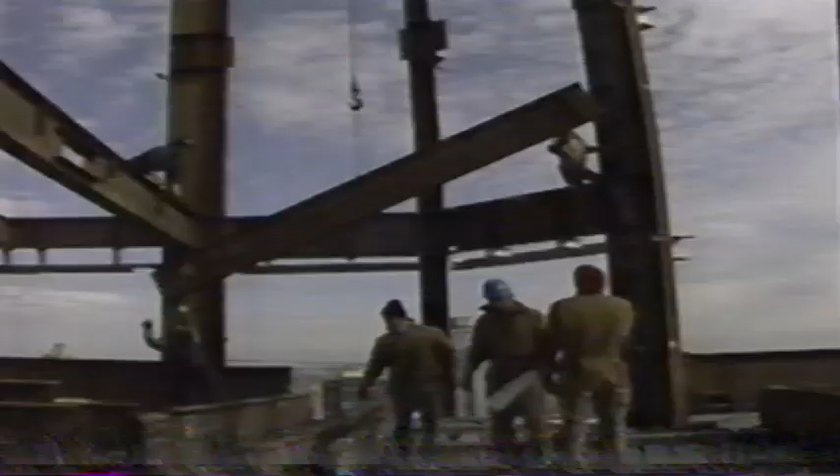Of course, with so many partners, there are bound to be fights. I want a letter to SOM saying, you owe us 5 weeks delay. He delayed the whole core and shell of this building 5 weeks. Please write the letter. But they always forgive and forget in the end.

In the next 5 programs, we'll see why a conflict over the color of a brick threatens to bring the project to a halt. Why a single tenant is so important it can demand that the 3rd floor be called the 4th floor. Why a trip to Venice turns into a nightmare back in Manhattan. And why the lack of a budget can bring on a fit. When the hell are we going to even put them together to tell Skidmore they go ahead and design this way, or tear the drawings up?

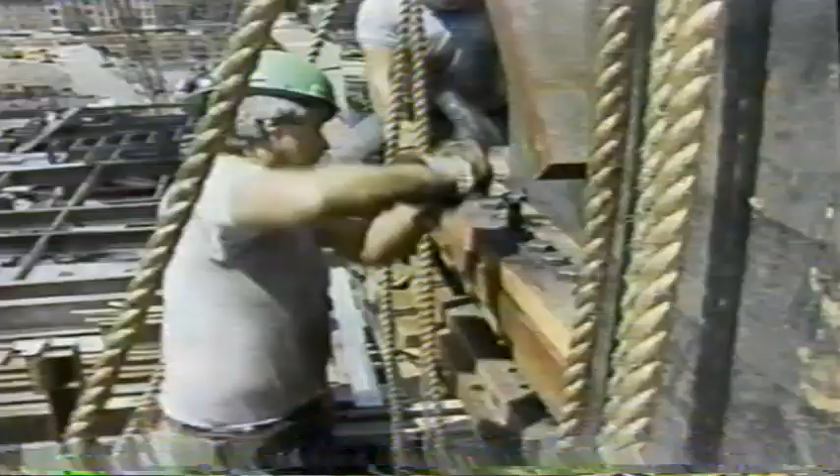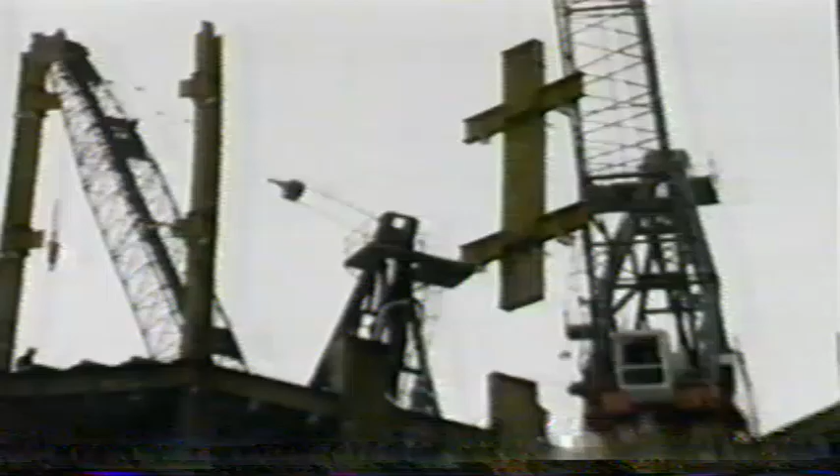This is the story, then, of how to design and build a skyscraper in 4.5 years. That's 110 years faster than it took the Egyptians to finish the pyramids at Giza. It's a tale of technology, and art, and money. But above all, it's the story of the people who built it. For this is one of the world's largest handmade objects.

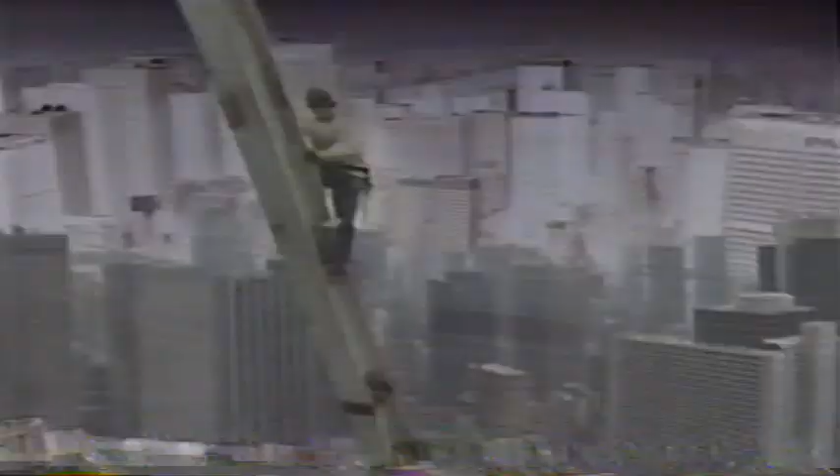In late 1984, a 4-acre parking lot in Manhattan stretches out from 8th to 9th Avenue between 49th and 50th Street. It has its cars, trucks, and minivans too. But this is a parking lot with a difference. It's worth $100 million. To spend that kind of money, you have to picture a future in which this patch of asphalt becomes a new commercial and residential center, with a skyscraper towering above where Chevys now roam.

Developer Bill Zeckendorf Jr. saw the possibilities, but that's not too surprising. His instincts have been honed over a lifetime of work in the real estate business. He began his career in the 1950s in the firm of his father, William Zeckendorf Sr., a legendary developer whose rise and fall was the stuff of a Hollywood miniseries. He was very flamboyant. He probably had the best real estate mind of his time, very shrewd.

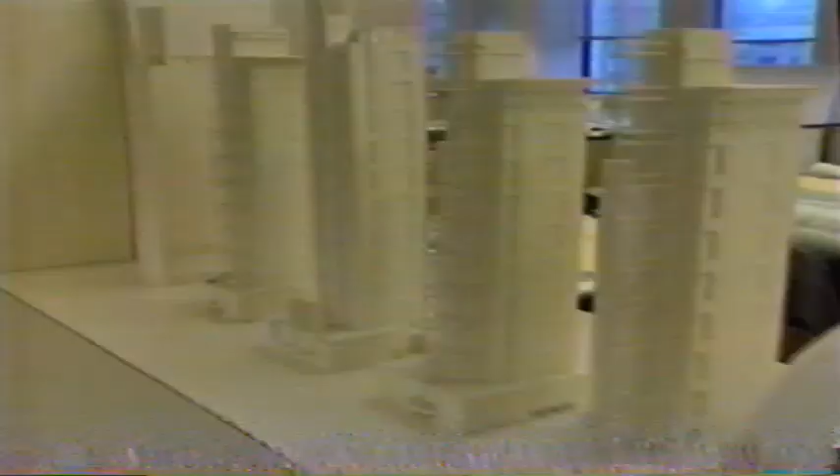So he spends several million dollars more here at the New York offices of Skidmore, Owings & Merrill. SOM is the nation's largest architectural firm and one of the world's most prestigious, with broad experience in skyscraper design. The principal architect of Worldwide Plaza is David Childs. He begins work in early 1985.

It is a frustrating profession because unlike most of the visual arts, one does not deal in the final medium. A sculptor sculpts the sculpture and the painter paints the canvas. But in architecture, you do everything remotely. It's all done with magic, mirrors, and we build models that are supposed to look like the real thing. And we do drawings that are two-dimensional, but by the trickery that Giotto taught us of perspective, we make it look like 3 dimensions. And so it's all remote.

You must be dealing with the things third hand in order to try to explain them to your client. And that's the other aspect of architecture, which is different from painting, which if somebody likes it, they buy it. One can't afford to build the building and hope to find the client.

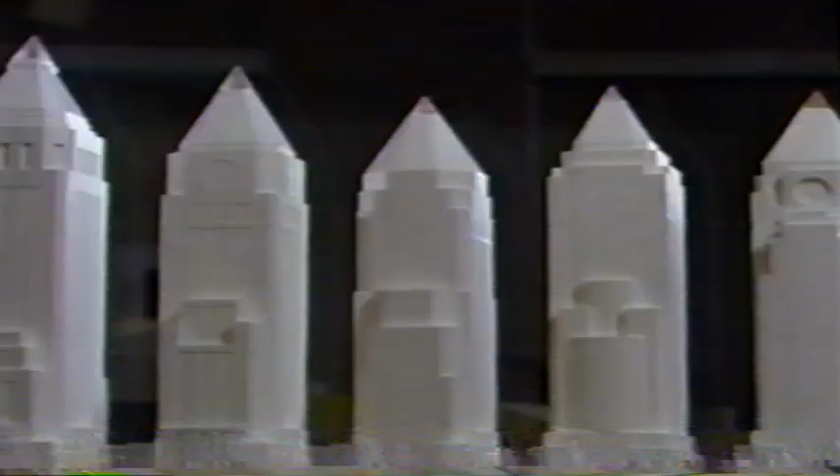Childs and his team also use sophisticated computer imaging to try out different ideas for the building. These CAD/CAM images can demonstrate in seconds how each change will affect the look of the building.

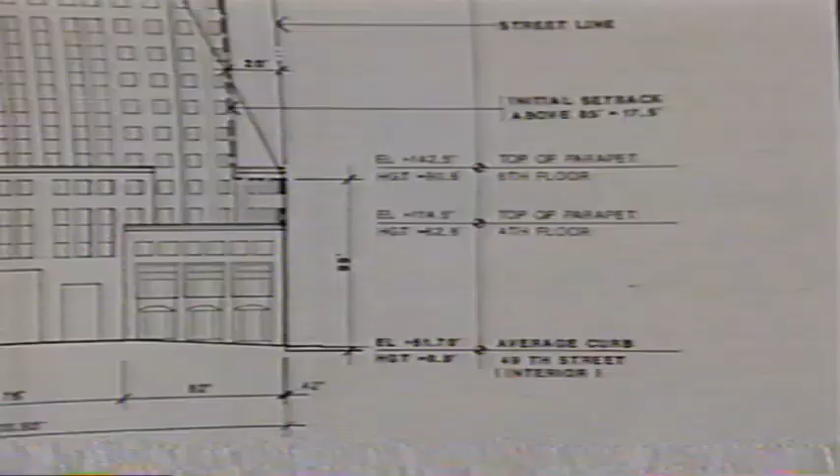The relationship between Worldwide Plaza and the surrounding area can be shown too. Members of the community are especially concerned that the skyscraper blend in with the neighborhood. The skyscraper must also satisfy zoning requirements limiting height, bulk, and density. The building's shoulders, for example, had to be scaled back to fit within these lines.

As the process of shaping and reshaping Worldwide Plaza continues, David Childs refines his vision of the building as a modern interpretation of classical skyscraper design.

What I'd like to do with this building is to have it be the perfect example of what we all imagine around the world as the great American classical skyscraper. And to do that, because it will always be seen in such prominence from around the whole city and from New Jersey as well, I've designed this in the classical 3-part piece that all the great skyscrapers of New York have taken. That is the base of the building, the shaft in the middle, and then the great exuberant crown, much like a column, at the very top.

Let me talk about the base first. The bottom of the building is designed with a series of low elements, 60 feet high, in keeping with the scale of the Clinton community, those lower buildings that frame the surrounding area. But in the center of that piece is a great, warm, welcoming entranceway to the arcades and to the office building itself, flanked on either side by shops and lights and detail that gives the pedestrian an interesting animated walk as he goes by the building.

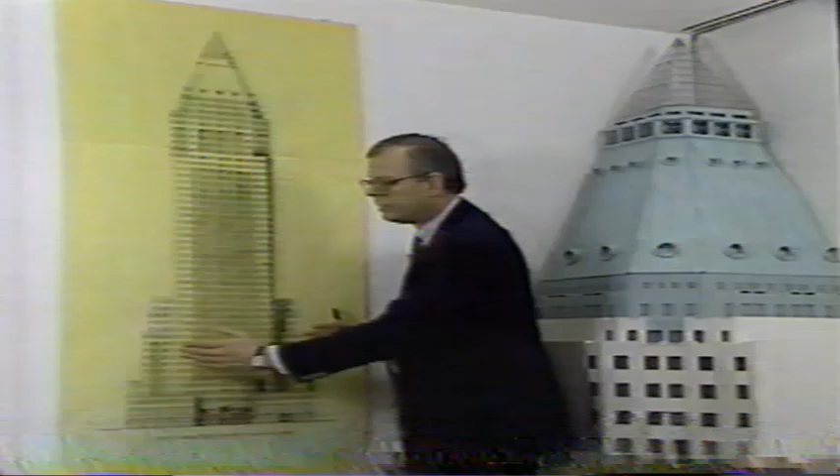The main centerpiece of the building is the shaft, simple in its brickwork with clear glass windows throughout. On the bottom of that shaft, where very large floors were necessary, I've allowed the vertical thinner section of the shaft to ride all the way down. Because this building, with its much larger floor plates than the classical traditional skyscraper downtown, needs to be thin and given a vertical aspect to it.

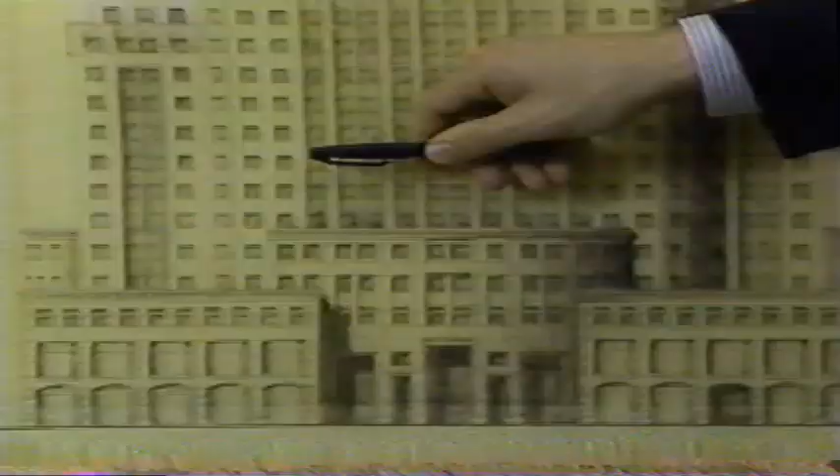And to do that, these fluting pieces, like a column, the darker vertical elements rising through the middle, give it a pinstripe, like a suit, to keep that elegance and thinness all the way through it. The edges are clipped at the corner, chamfered back. So again, you read the thinner profile as it rises up through the building, finally to come to the crown of the top of the building.

And here is the symbol that we all will remember as we enter the city or drive around through it, a true, thick, copper-clad roof, green as it will age over the years, great windows that not only let air into the mechanical systems, but are lighted from behind, giving these spokes of light that will shine out over the city, and then culminating at its top in this lantern, the lighthouse image itself, a clear crystal pyramid with the light inside.

That is that final point of light that describes this building not only for its project and for Midtown, but for the city itself.

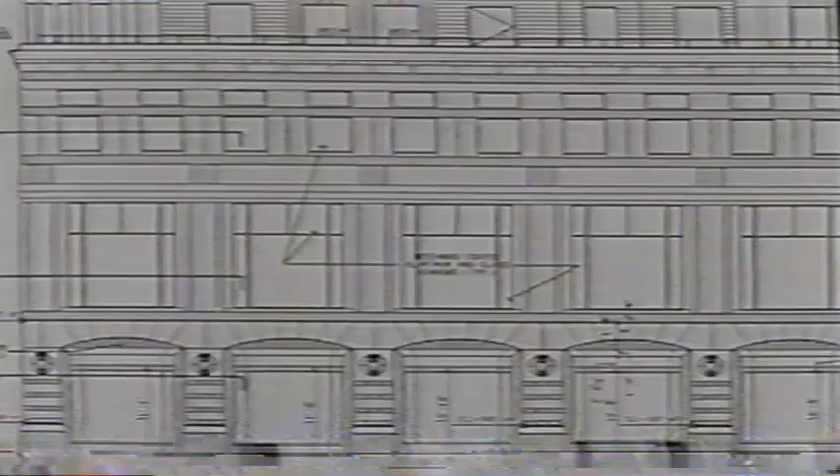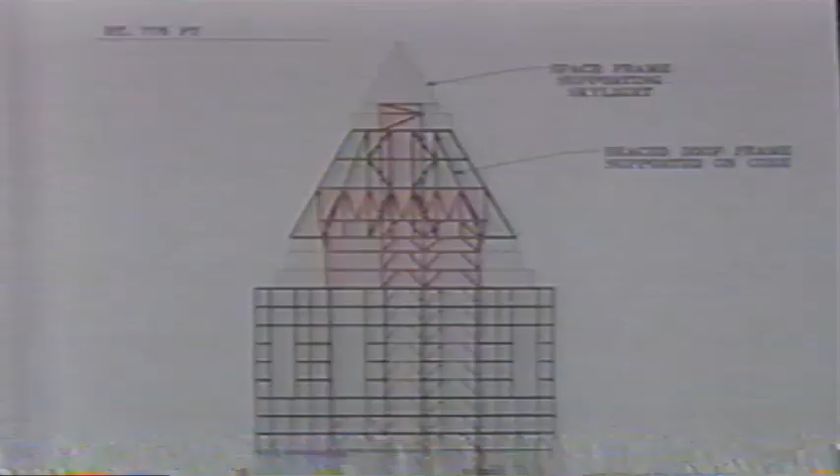But even after the major design elements are set, SOM's work has only just begun. Dozens of detailed drawings must now be prepared by the staff. From the start of the project, SOM's engineers have also been working along with the architects. Their plans show the major structural elements of the building.

The mechanical elements of Worldwide Plaza, from the elevators to the faucets, are designed by Cosentini Associates, an engineering firm hired by the developers.

We are the designers of, how can I express it, the heart and veins of the building. If you take the architect, he designs what the skin looks like, what the face looks like, what the hair looks like, the cosmetic portion. Then there's the structural engineer. He designs the bones of the body, how to keep all these things together. And then along comes what I consider the most important part, which nobody wants to know about, which is the heart and the pump and the valves and the veins that make the body tick.

We design the mechanical systems and the electrical systems and the elevatoring systems and the lighting systems, and the plumbing systems, all the things that are very mundane that nobody wants to know about, but without them the building can't function.

The company responsible for turning the drawings into reality is HRH Construction. The HRH team has to get everything built on time and on budget. So it's brought in during the design stage to tell the architects what's practical and what isn't, from the window glass to the elaborate brickwork.

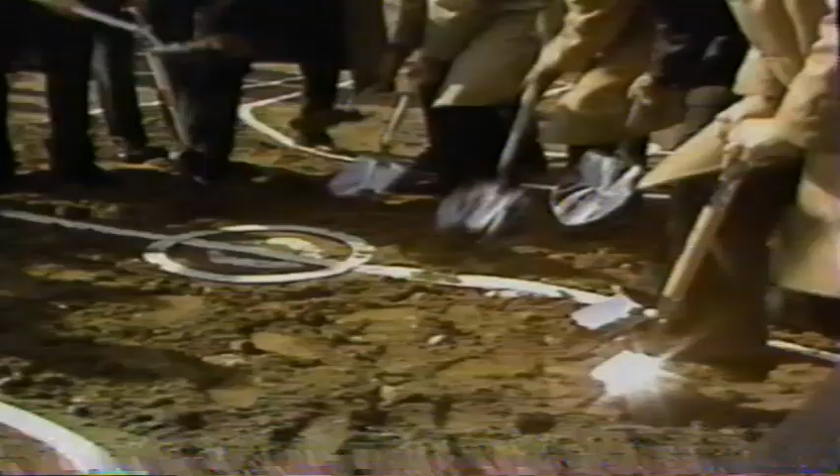How do you know you... Throw it in the middle. Let me count. One, two, three.

For all the major players, the stakes are high. If David Childs's design doesn't measure up, his reputation could be tarnished. If the building fails financially, Bill Zeckendorf and his partners could lose their shirts. And if it doesn't get built on time, Dominic Fonte, the day-to-day construction manager, could lose his mind.

From his headquarters on the site, Fonte will oversee every detail of construction for HRH. Any major delay could cost millions.

We're under so much pressure. It's different from a hospital or from IBM. IBM I consider a very starchy organization, okay? You cannot get excited, or else that's unprofessional. If you get excited, you shouldn't show emotions. And here we have to show emotions. If you keep things inside, within yourself, you will very soon develop ulcers, and you will very soon realize that this business is not for you, because you cannot handle the pressure. There's a lot of pressure. You have a pressure of money, you have a pressure of time, you have a pressure of coordination. And these three working together built up this steam inside the kettle.

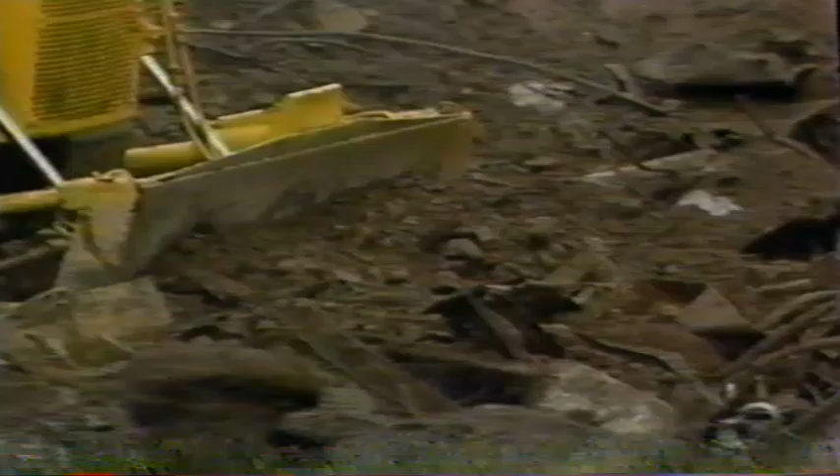So if you want to dig them up, or move them, or replace them, you have to get a permit. Or 2, or 20. In the city of New York, you open up the street, it's like a bowl of spaghetti. There's a lot of cable, a lot of conduit, a lot of pipe. There's so many that if you call the specific agency who put the pipe down there 40 or 50 years ago, first they say, well, it's not mine. They don't even know if it's theirs. And if they think it's theirs, by the time they check and find out that it is theirs, or isn't, it will be at least another 2 or 3 weeks.

So I'm dealing here with people. I mean, I'm laughing now because I think I have to laugh to keep my sanity. But it's frustrating, it's crazy. And today, still, we don't have approval from the water department because they don't have time. They have so many other projects they have to deal with. Why is ours more important than everybody else's? That's fine, their attitude is okay, that's the way they want to do it. But they don't realize that this is one of the biggest projects in the city of New York.

I would hope that someone will look at the drawings for at least an hour. All it takes them is an hour to look at the drawing and say, yes, this location of the water pipe is correct, proceed with it. I don't have that yet. A year and a half has gone by. I don't have it.

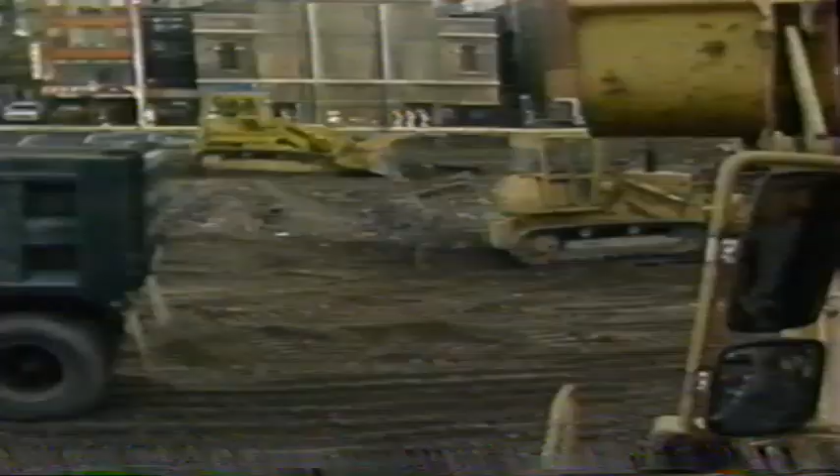As Fonte grapples with city officials, a subcontractor called Delma handles the excavation. 75 trucks will be needed each day for almost 4 months just to carry away the immense amount of rock and earth on the site.

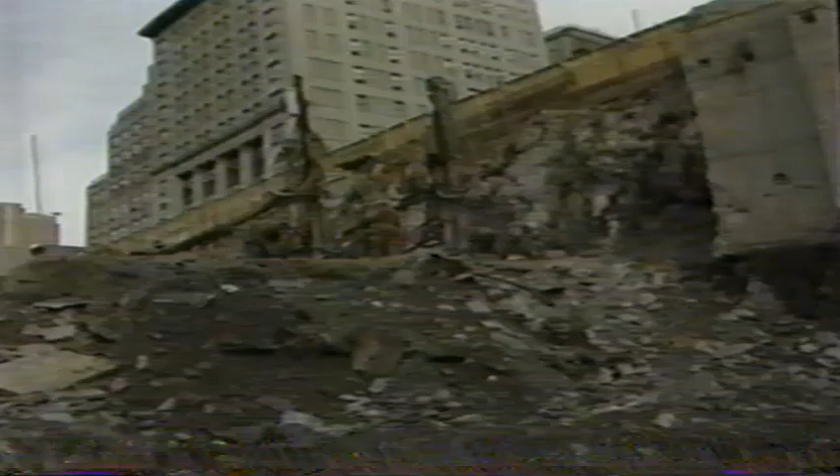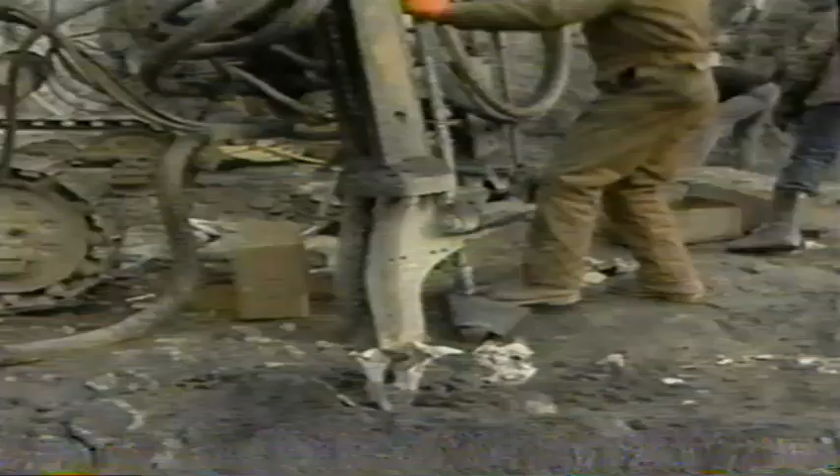18 feet below the surface, the excavators reveal the bedrock on which the skyscraper's foundation will rest. Core samples taken earlier helped determine just how far down the excavators would have to go. These drilling machines are preparing the way for the next stage of the process, drilling holes for the blasting team. The team's job is to blast away another 12 feet of bedrock to create a hole large enough, deep enough, and level enough to support the building.

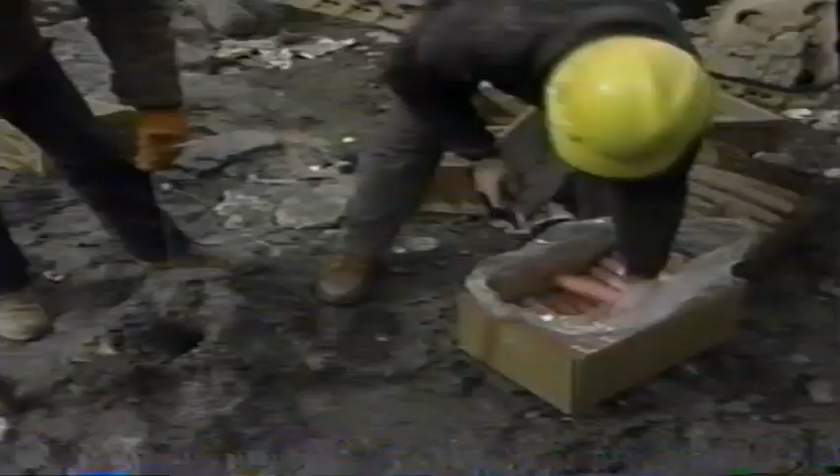Dynamiting in the middle of crowded Manhattan is a job for seasoned professionals, but the men who work in the trade sound more like ball players than blasters. It takes a while of practice. Of course, some people are better than others. You just get a feeling, you got to feel it. You got to have a little knowledge, plus you got to feel it. If you don't feel it, that's what makes one better than another. That's all. It's a dangerous job nonetheless.

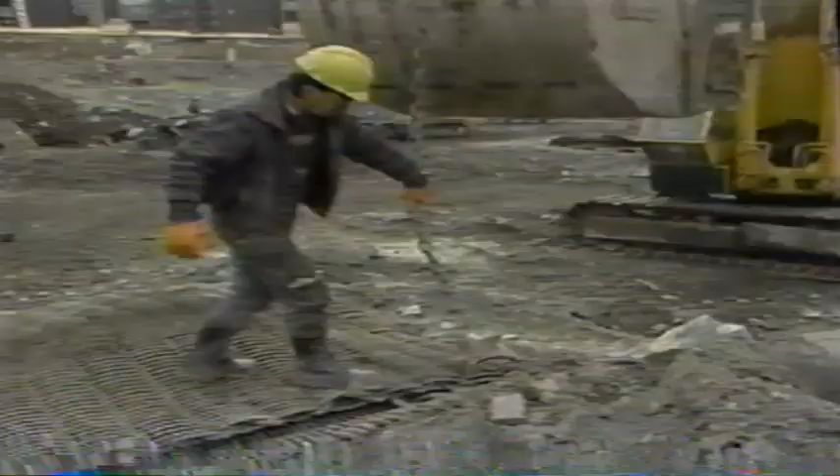The holes for the dynamite must be positioned carefully so that the explosion blows the rock towards the middle of the site rather than up in the air or out into the street, where hundreds of potential lawsuits are innocently walking. It's all very contained and controlled. Even the pace is slow and measured. Blasting takes place only once or twice an hour. After the holes have been filled with dynamite, heavy steel mats, each weighing about a ton, are draped over the explosion site to contain the blasted fragments of rock.

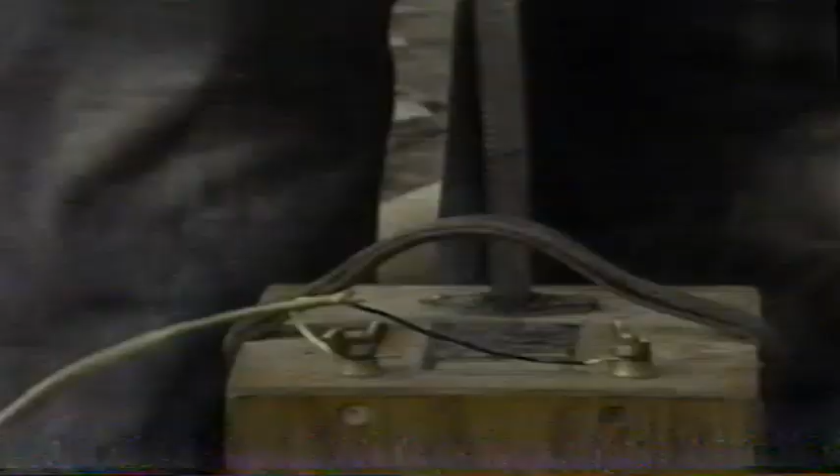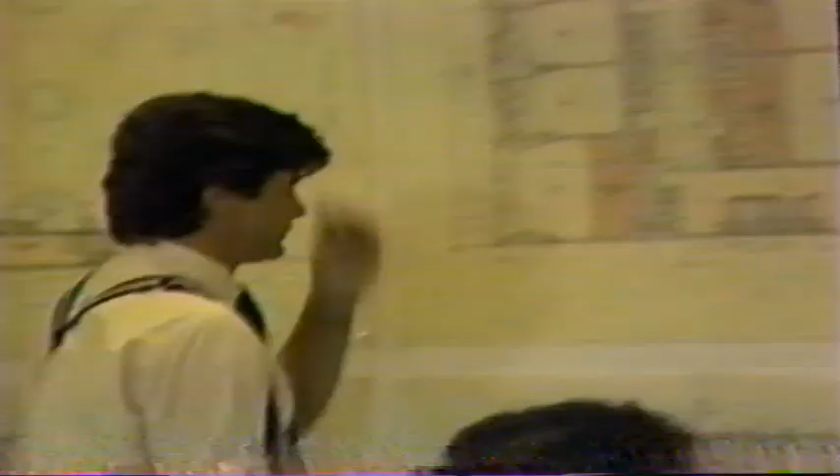While the hole gets deeper, the architects at SOM are still trying to finalize plans for many parts of the project. Sometimes they're only a step or two ahead of the builders. The escalator above, right, that space. Yeah, right, we can use some space under that for storage, can't we? Yeah, sure, we should be able to. A lot can happen to increase costs as drawings become reality.

Inevitably, there is a close and often tense relationship between, on the one hand, the architects and the construction managers who take no financial risk, and the developers who take a great deal. The man Bill Zeckendorf has named to watch over his investment is Jack Schuster.

We have 1,600,000 square feet of space, roughly, round figures. Construction very often is analyzed on the basis of so much a square foot. For every dollar more than the budget, we're talking about $1,600,000. If you've made a mistake, or if you've given a low budget that is $10 less than cost, which is altogether possible in the scenario I've painted for you, we're talking about $16 million above the budget. That's a very sizable piece of change.

Communication among the architects, developers, and construction managers is one of the project's biggest problems. The main participants meet every two weeks. It's here that Jack Schuster hears the latest bad news about the budget or the schedule.

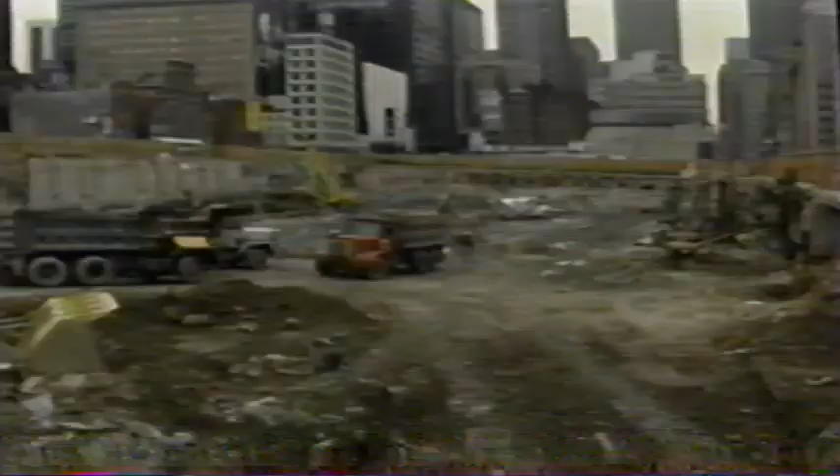But back at the site, the construction process is moving ahead without a hitch. The excavation has been completed to a depth of 30 feet, and the next phase of the project has begun: the building of the foundation.

Because it's built on solid bedrock, Worldwide Plaza can rest on what is known as a shallow foundation. In this case, a series of concrete squares called column footings. Each footing will serve as the base of a massive steel column. Together, the footings must spread the load of the entire building across a large area.

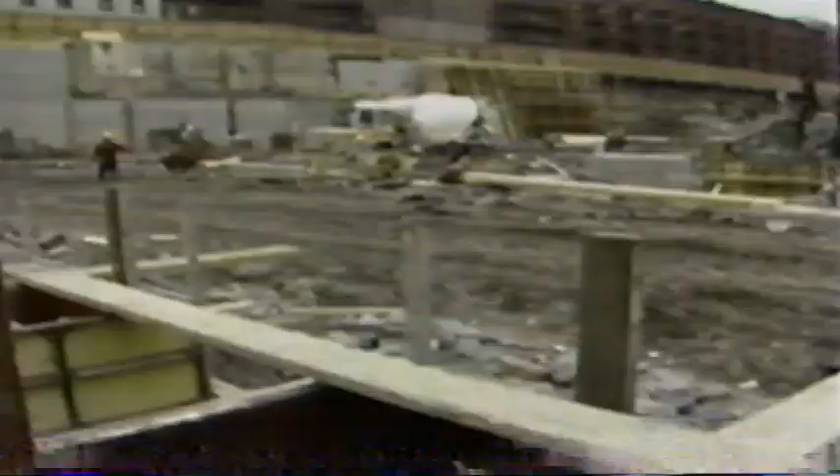At the site, concrete is about to be poured into the footing holes, which have been drilled or blasted and fitted with reinforcing steel rods to help the hardened concrete withstand stress. The concrete arrives at the site already prepared, a soupy mixture of water, sand, and crushed stone or gravel, and Portland cement, which is a combination of powdered limestone and clay.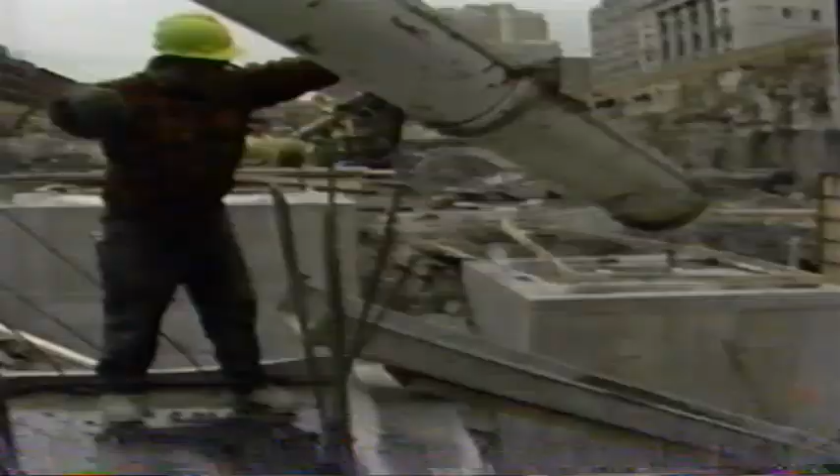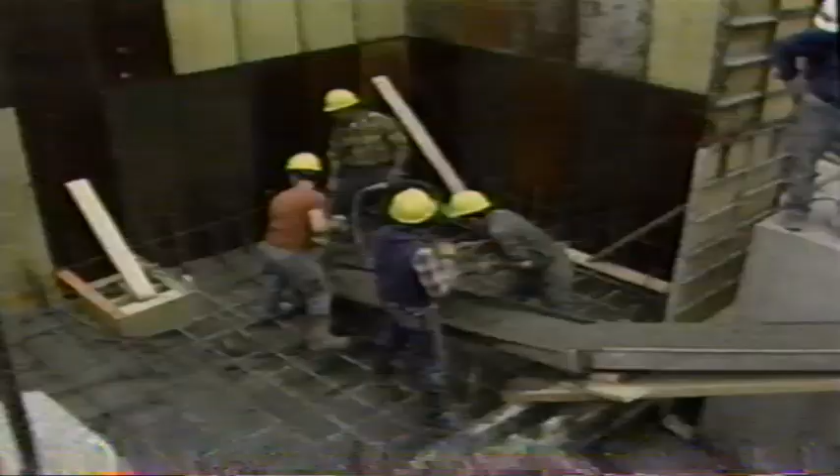The mixture has to be just right. Too much water will weaken it. Too little will create air pockets when it hardens, thus reducing the strength of the footings. The weather and temperature can also affect it. Buildings have collapsed because of substandard concrete, so every construction site has a quality control inspector to monitor the work.

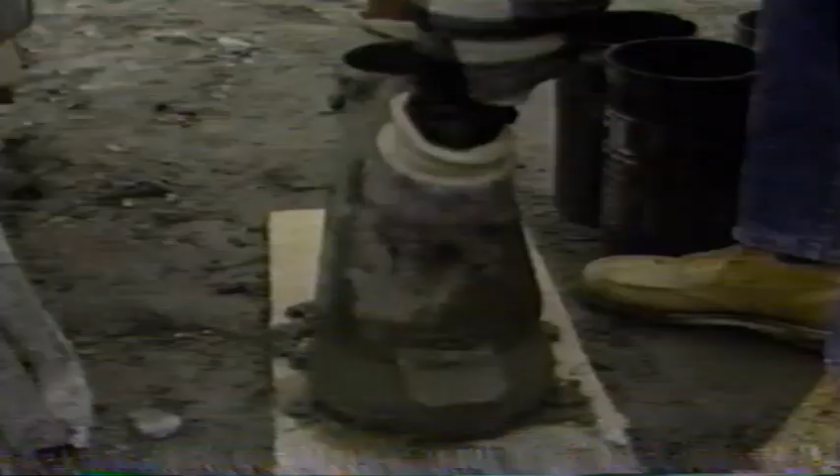First, he gets a sample from the latest batch of concrete delivered ready-mixed to the site. Then he does a number of simple tests, including taking its temperature, and the paragon of low technology called the slump test. The greater the slump, the greater the wetness.

Well, my job is to control the water ratio of the concrete. I am on the job for quality control. I take a slump test, I make a slump. I also take an air test. I take the temperature. The temperature of the concrete has to be a certain degrees. In the wintertime, it shouldn't be no less than 50 degrees. Summertime, no more than 90.

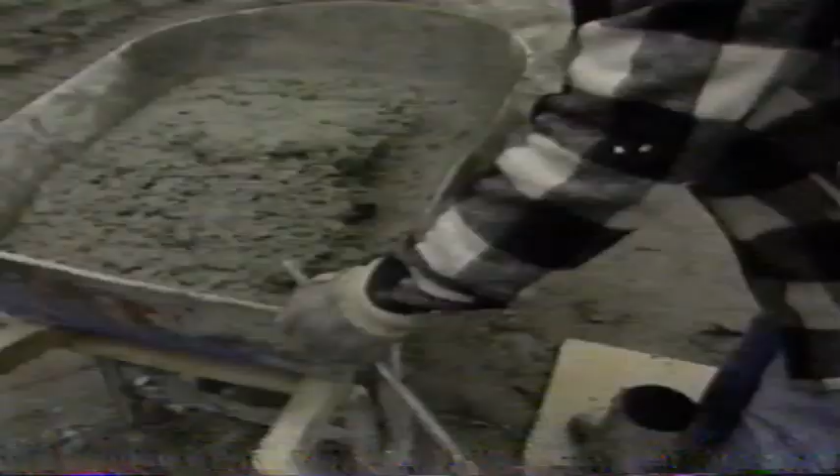I take the concrete, I put it into the slump. I put it in like 3 layers, 1/3 at a time. I rod it 25 times each layer. Then after that, I strike it off, and I lift the slump cone within 7 to 10 seconds. Then I take the slump and put it next to the concrete, and put the rod up there, then measure from the bottom of the rod to the center of the slump cone. That determines the amount of water. That's how I determine the water ratio.

So far, everything is going according to plan. But for Tony Raffanello, HRH is the exception, not the rule. A typical day in this business is one you can never expect. Get to the job and for some crazy reason something's going wrong.

What is that going wrong? All of a sudden we realize that one of our permits to work in a specific area is not completely stating exactly what we have to do. So we have maybe 20 or 30 men ready to do a job, and the city agencies will say, this permit doesn't read properly, you can't work here today. You've got 20 or 30 men to replace on the job. A lot of bucks. This business is money, dollars. And unless you can show the dollars up front, you're out of business.

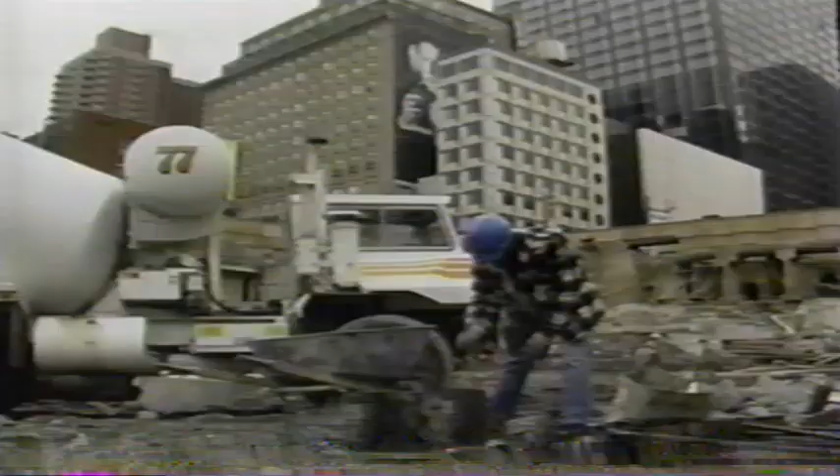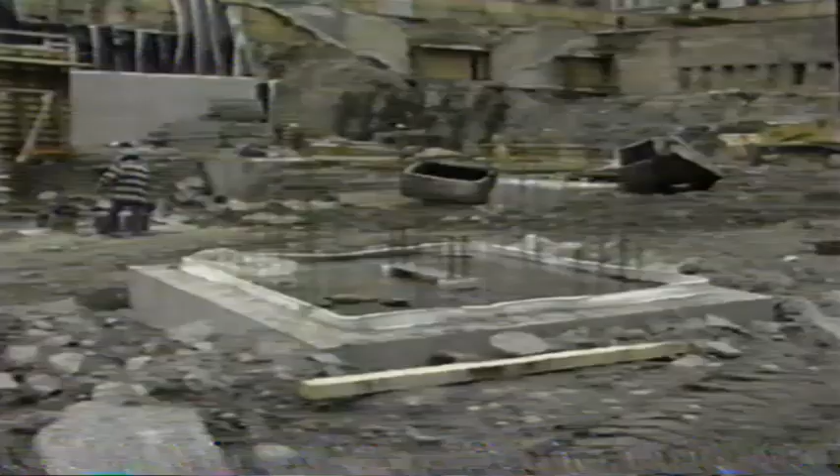Today is a good day for Raffanello. The concrete passes inspection, and the work goes on. The footings will harden over the next 3 weeks until they are ready to receive the first steel columns, due to arrive in May.

The building steel is being fabricated in Houston, some 1,600 miles away. A company called Mosher Steel has been working on the project for nearly 6 months. Mosher had to look eastward for new business because of the sad state of the local construction industry. Its $26 million bid and its reputation for quality won it the contract for the Manhattan skyscraper.

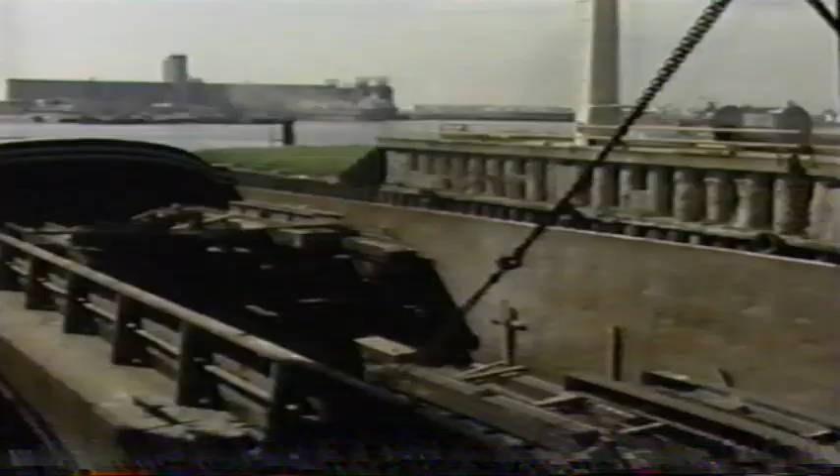The process of fabrication begins with the arrival of raw steel from Luxembourg. Most raw steel for American skyscrapers comes from overseas because it's much cheaper than American steel, even with all the transportation costs added in. Each piece is already labeled with information about its type, its size, and its weight.

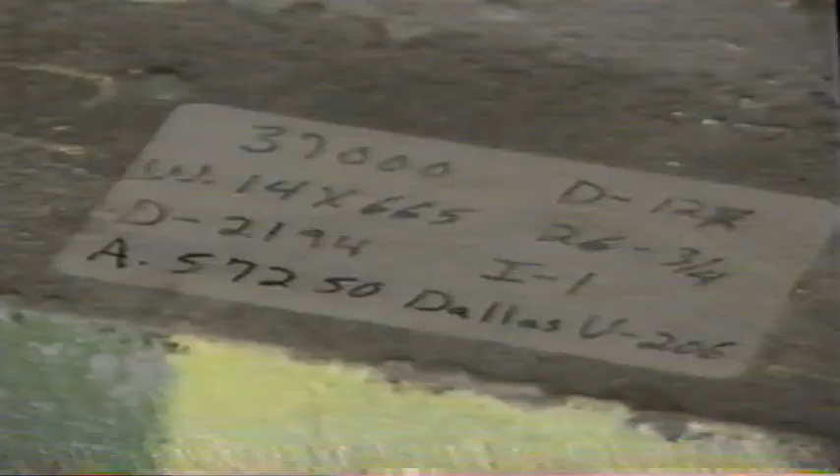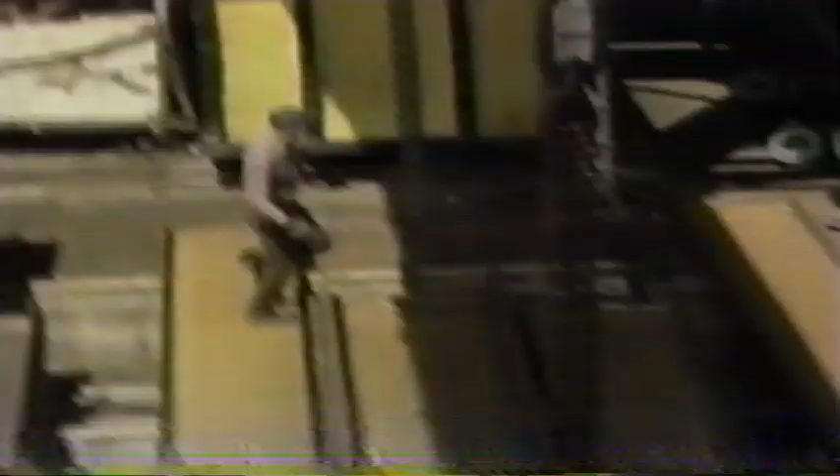Mosher's job is to turn these pieces into 19,000 tons of fabricated steel, to customize each one into a column, beam, or girder that will fit perfectly into the building's skeleton.

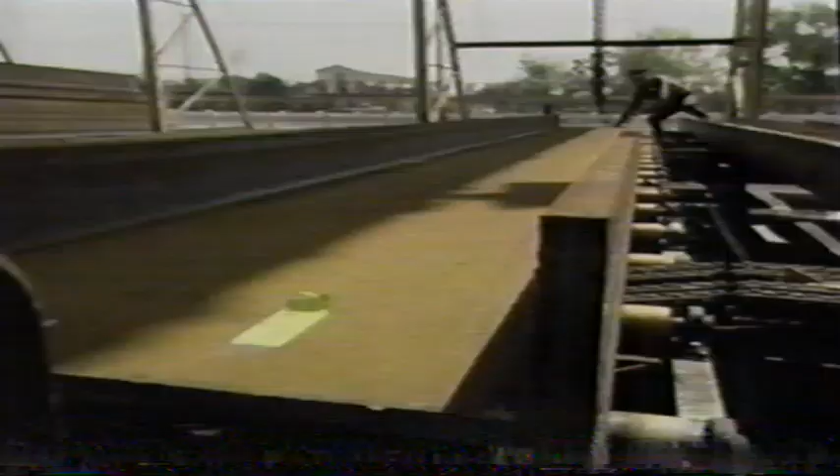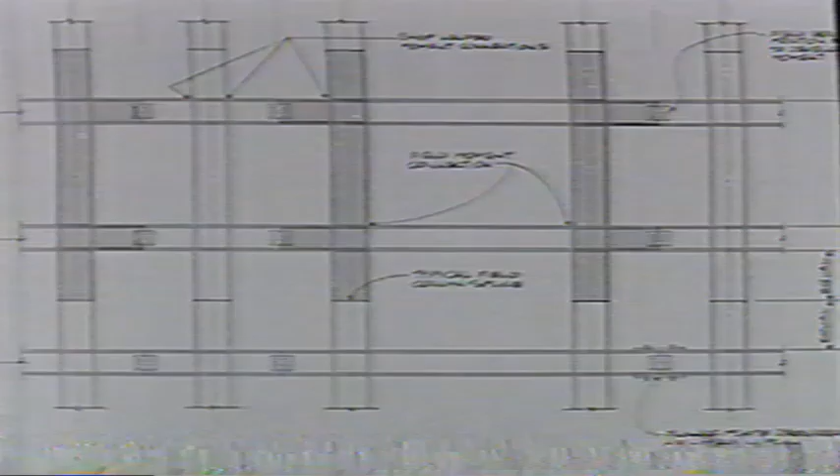The process of fabrication really begins here in the Mosher Design Shop, where SOM's basic design drawings get turned into the fabricator's shop drawings. These detailed drawings show exactly where each piece will fit, its precise dimensions, and how it will be made. Mosher is free to design the pieces and connections so they can be made as economically and efficiently as possible within the limits of accepted engineering practice.

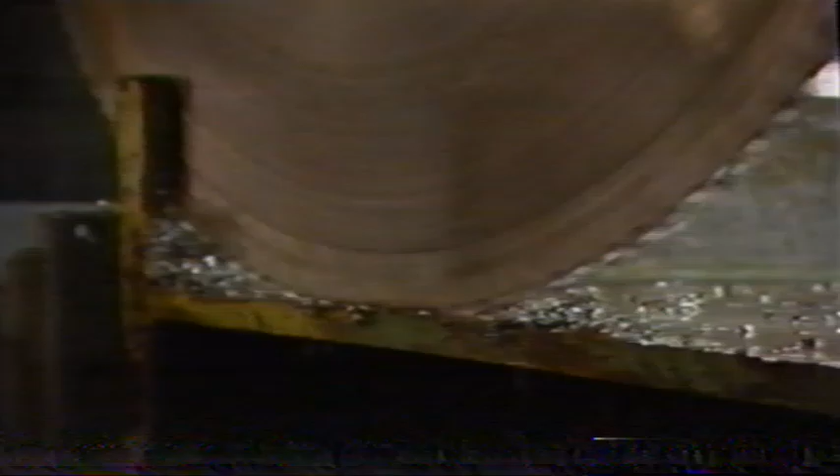Some of the major pieces are made to length in Luxembourg, but many pieces need to be cut with an accuracy of 1/8 of an inch. Small discrepancies in the length of every piece could add up to a major error in a building nearly 800 feet tall.

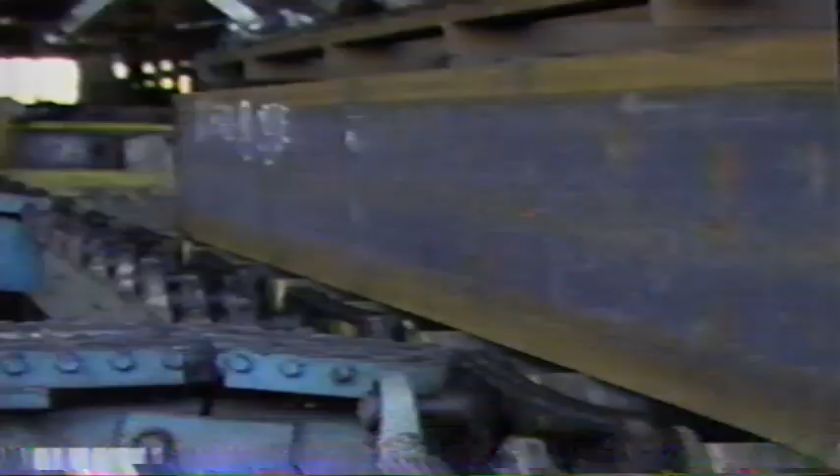Imperfections in the raw steel can be even more of a problem because they weaken it. So every piece is carefully inspected by a technician hired by Zeckendorf. Right now, he's checking for air bubbles or laminations.

Laminations come from the original ingot. If there's an air bubble or gas bubble in it, when the ingot is rolled, the bubble gets flattened. The way you find it is you bounce sound through the material, and if the lamination is there, the sound will bounce back sooner than it should. It'll show up as a reflection on the scope.

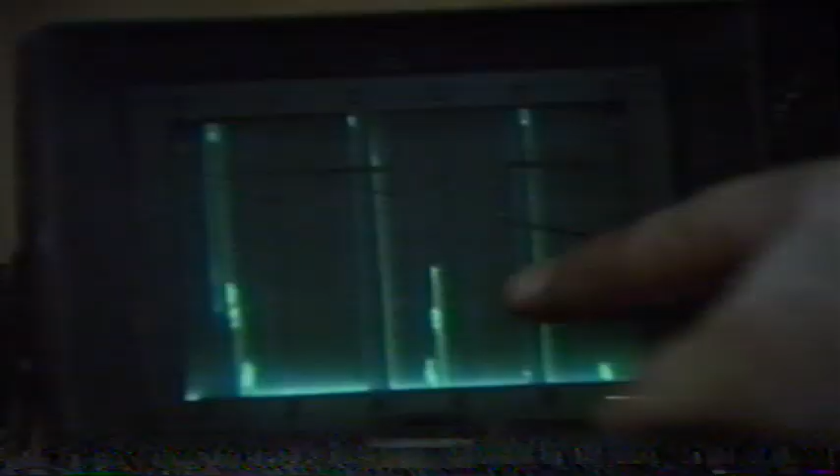The whole idea behind a quality program is that you can't inspect in quality. They have to design it in and build it in.

Today, Mosher is fabricating steel for the 13th floor, even though back at the site, the foundation is still being laid. Typically, the company wants to be 5 to 6 months ahead of the construction schedule to allow time for transportation of the steel to Manhattan and to build up the stockpile of pieces by the time erection begins.

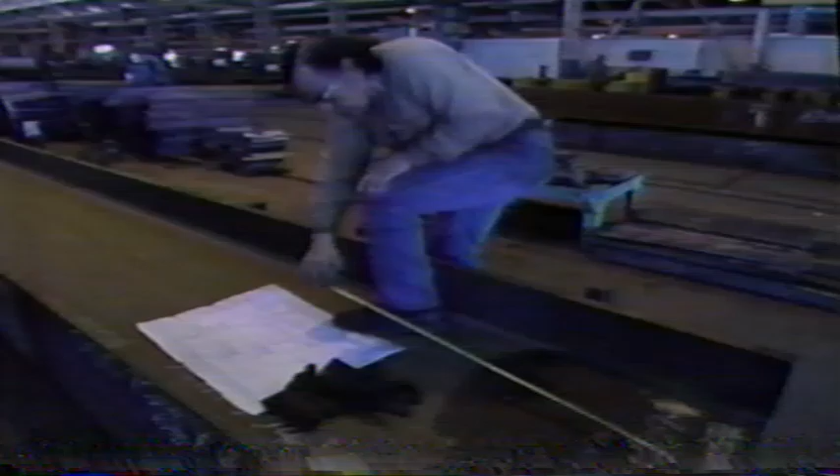After inspection, the raw steel must be carefully measured and marked so that each bolt hole and connecting piece can be put in exactly the right place.

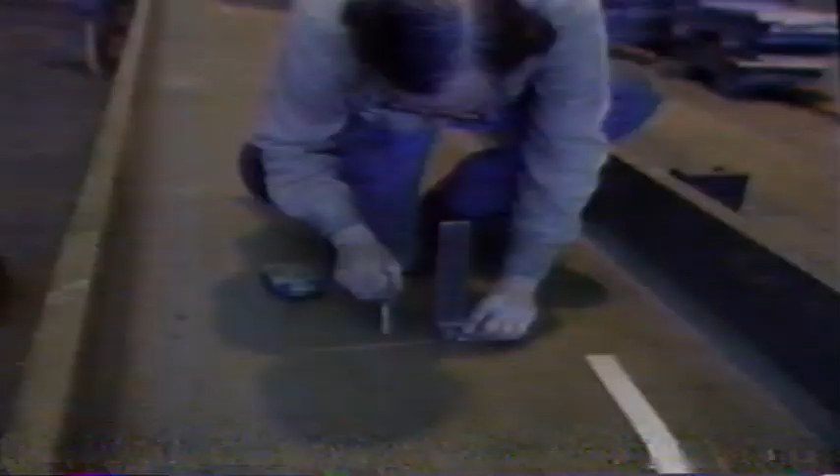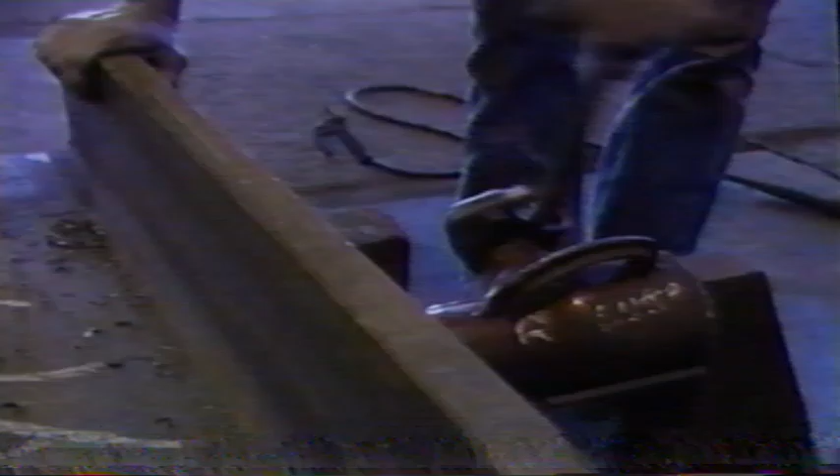They're about to put together a piece called a tree column with a central trunk thick enough to bear a vertical load of a couple of thousand tons. Each tree column is slightly different because it goes in a different place and supports a different load. At the foot of the tree column, a steel worker attaches a strengthening plate, which will help connect this column to the one below it during construction.

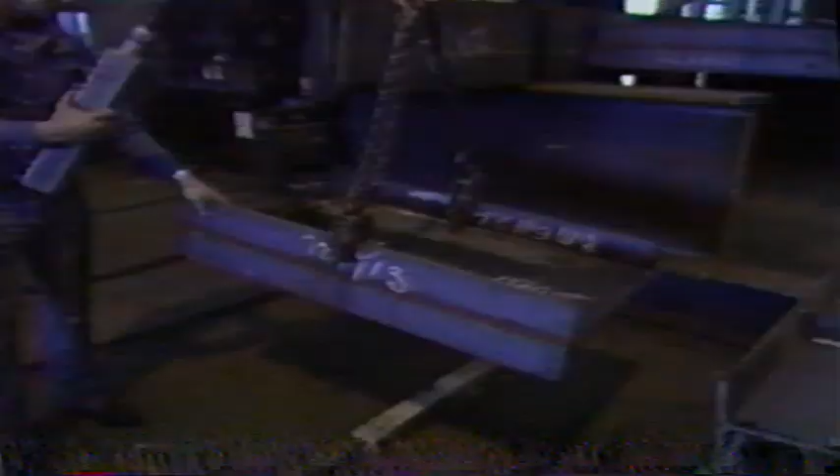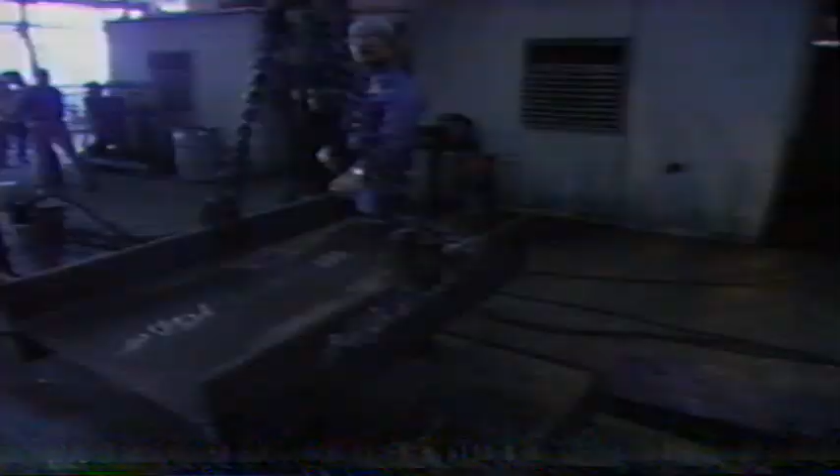This is one of the branches of the tree, called a spandrel beam. Another beam will be connected to it when the column is in place. The spandrel beams are put on the column now to reduce construction time later in the field.

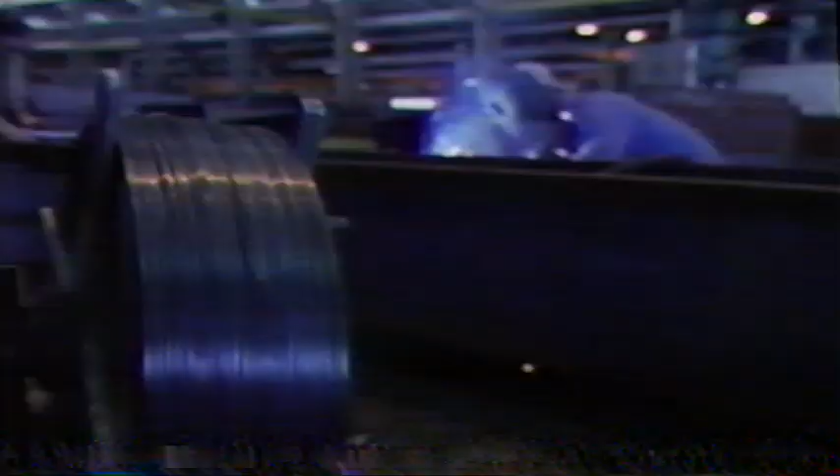The spandrel is welded to the trunk by an arc welder. The electric voltage the welder produces is so concentrated and powerful that it can create a temperature of 10,000 degrees Fahrenheit. When the tip of the welding rod is held against the two pieces, all three begin to melt together to form a single puddle of molten steel, which is drawn slowly along the seam being welded. When the weld cools and solidifies, a permanent bond is created.

For large pieces like this one, a number of passes may be made to build up the weld to the proper depth and strength.

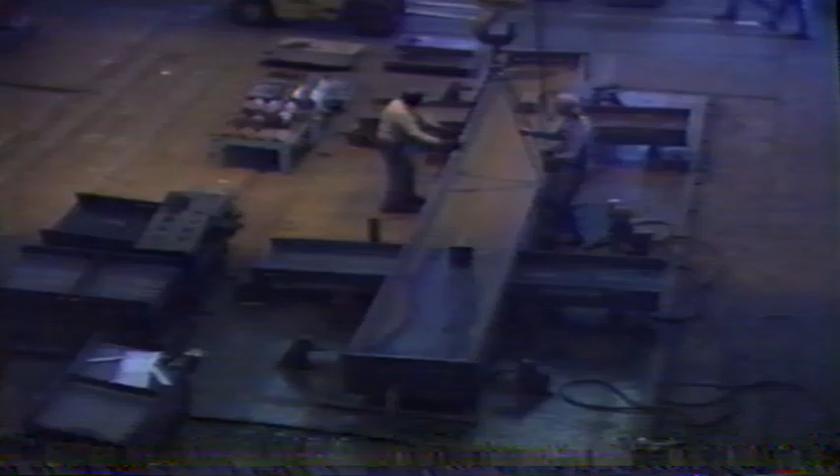During construction, each spandrel beam in the 2-story tall column will have to be bolted to another beam. The Mosher engineers have calculated the exact number and size of the bolts needed to withstand all the forces that will converge on the connections when they're finally made.

Although a safety factor is always built in, each engineer lives with the fear that his or her calculations could be wrong.

I always worry about collapse, very much so. I know the two engineers in Kansas City, with the Hyatt Regency. In fact, I had a collapse once. I designed a beam and didn't put the proper stiffeners in, and the beam collapsed under a huge pile of gypsum. Luckily no lives were lost, but the tunnel train that burrowed underneath the gypsum couldn't go through its tunnel because the tunnel height was decreased because of the beam failure. It's a fear.

When a structural engineer recognizes that he's got a good team behind him that's aware of public safety, aware of competency of designs, using basic laws, using the laws of God if you will, free body diagrams, and using the principles of engineering, there's a great deal of comfort in that for all of us.

When the finished pieces pass inspection, they're loaded on barges for the long trip east.

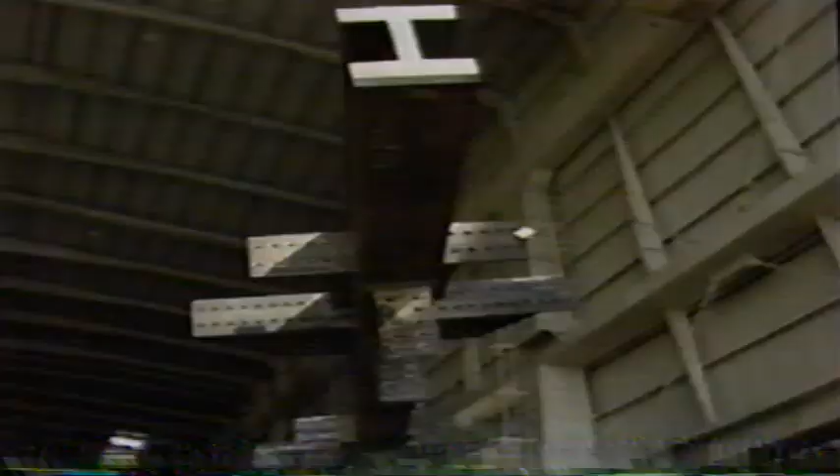But even as steel for one part of the building goes out, changes are still being made in the design of others.

My personal opinion is that it was started too soon. As any fast-track project like this, the designs are not completed, and already we're starting to buy material and make details, and there's still changes being made. I would expect revisions to come through, and the only thing it costs is time and money.

You got to stop and fix it. There's nowhere around it. It either has to be fixed in-house or in the field. And those revisions that we're getting late are going to have to be fixed in the field, which is just money, time and money.

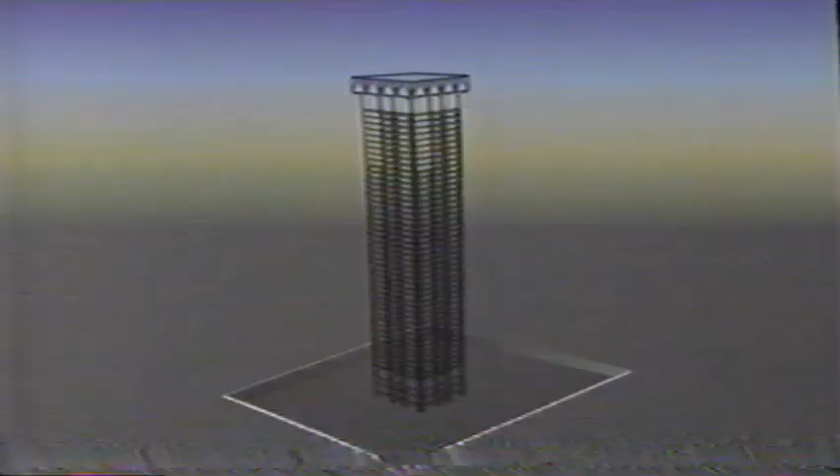Fortunately, the biggest change in the structural design was solved by SOM before it ever got to Mosher.

The engineer's design called for a steel frame at the building's core, surrounded by a larger steel frame at the perimeter, with the whole structure forming a tube with its inherent rigidity. But then the architects decided to incorporate an elliptical arcade into the building.

For Gary Stefik, the SOM engineer who designed the tube, the change created a major problem. That was our biggest structural problem, actually, that we didn't touch on here, because the arcade cuts through the tube. And it was presented to us as an accomplished fact. It wasn't studied, wasn't discussed at all. They came back from a city planning meeting and they had suggested doing it, and the city planning thought it was a great idea, and so we were stuck with it, even though it totally destroyed our tube at the base.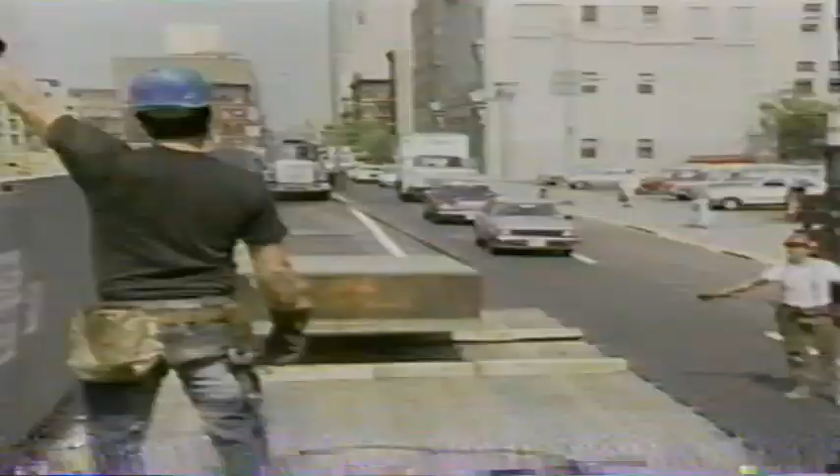Finally, on May 14, 1987, the first piece of steel arrives at the site from Houston. This 8-inch thick plate will rest on one of the now hardened concrete footings to provide extra strength for the base of the first steel column.

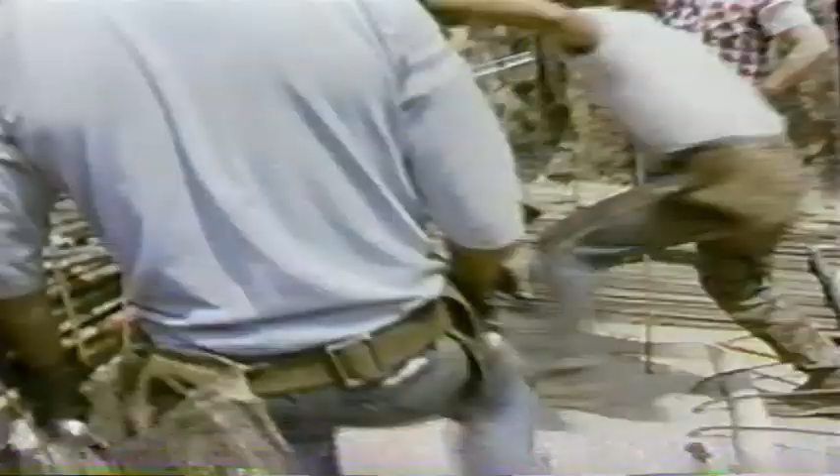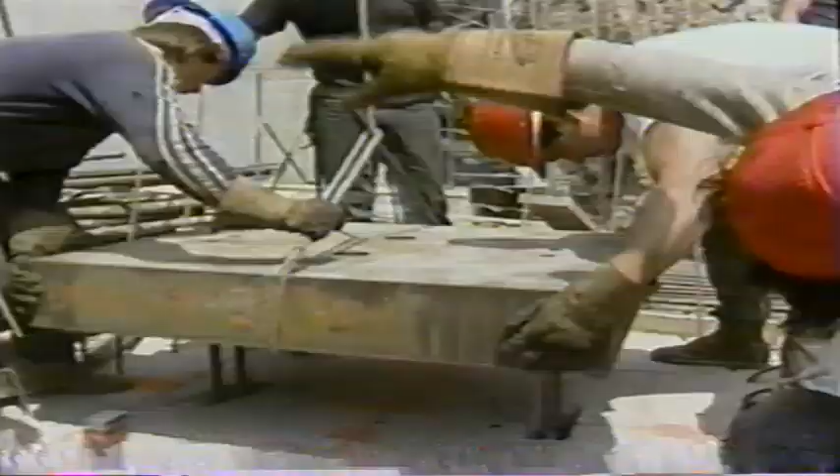Coming down low. Coming down. Look now, good, come on down. Watch it, good. Yeah, we didn't put it all the way. All right, that's the way to do it, guys.

The steel comes in pre-cut and with bolt holes and everything. There's no leeway. It can't be wrong. So when that column sits on top of that plate, everything is supposedly going to fit. And this has to be true for the next 800 feet. So that's the importance of getting the foundation done properly.

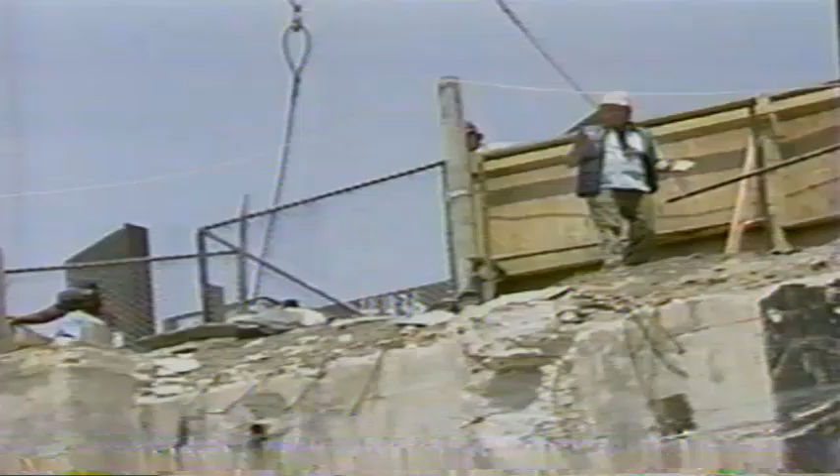Every step in the assembly is marked on drawings provided by Mosher. Nothing is left to chance. The number of each piece of steel, where it belongs, and how it has to be connected must be checked and double-checked before any move is made.

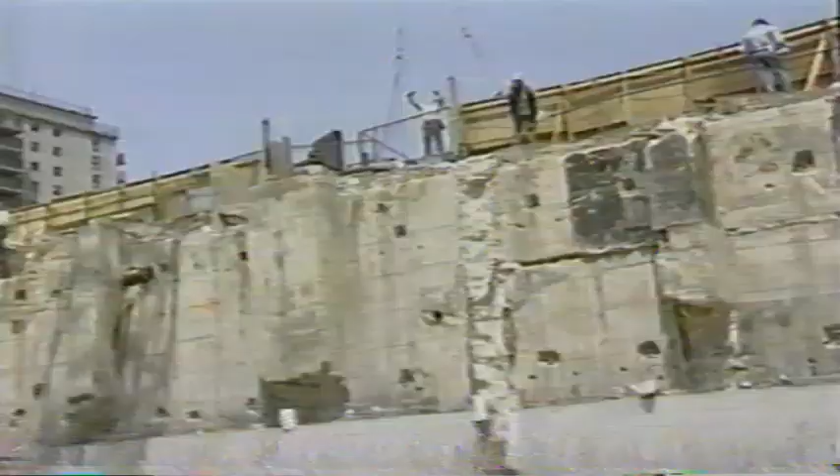Now it's time to unload the first tree column, a full 20 tons of steel.

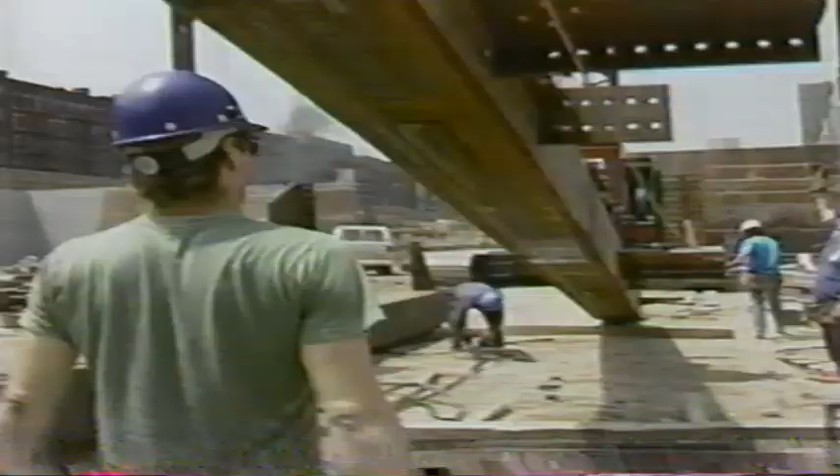Because it will stand at the base of the building, this column is one of the strongest and thickest. It will have to support a load 175 times its own weight when Worldwide Plaza is finished.

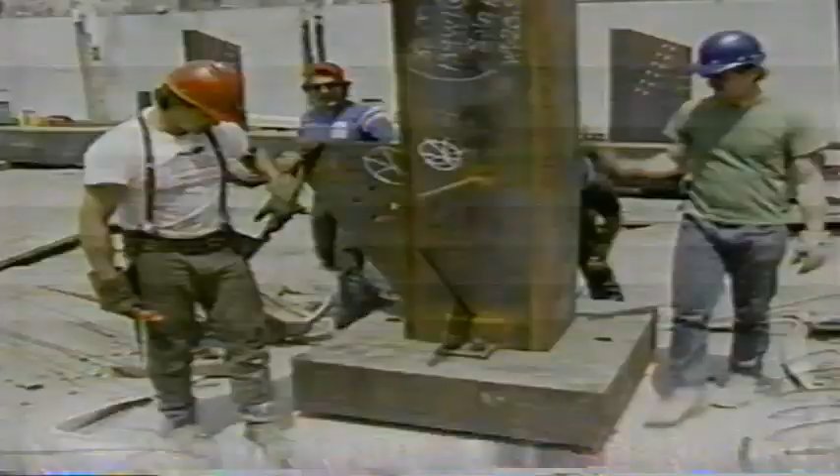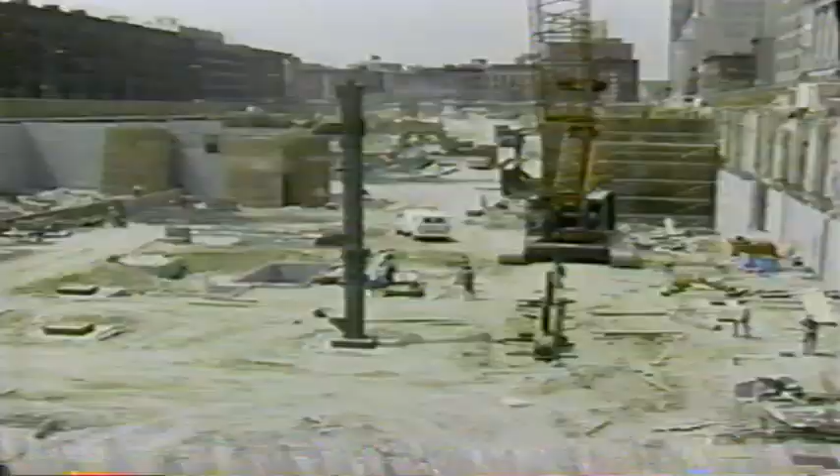The iron workers here today will stay together as a team for the next year. Soon they will be joined by men and women from 40 different trades, up to 1,000 workers at one time. But today, the family on the site is still small. Small and determined, with a quiet pride that outsiders might miss.

I don't know really which shoes I would like to be in. There's advantages in different positions. Obviously, I would like to be in the shoes of the architect because I could say, I designed the building. It is a monument which you built for yourself. And you could say, that's my idea, okay? So yeah, I would love that. I would really love to say that's my idea. So I would love to be in his shoes. On the other hand, I would love to be in Bill Zeckendorf's shoes because I could then say, that's my building. Physically, it's my building. And it's a beautiful building. So that's some satisfaction also. So it's very difficult, really, to say which shoes you would want to wear. I'm very happy with the shoes I have on now. Because then I could say, they designed it, he owns it, but I built it.